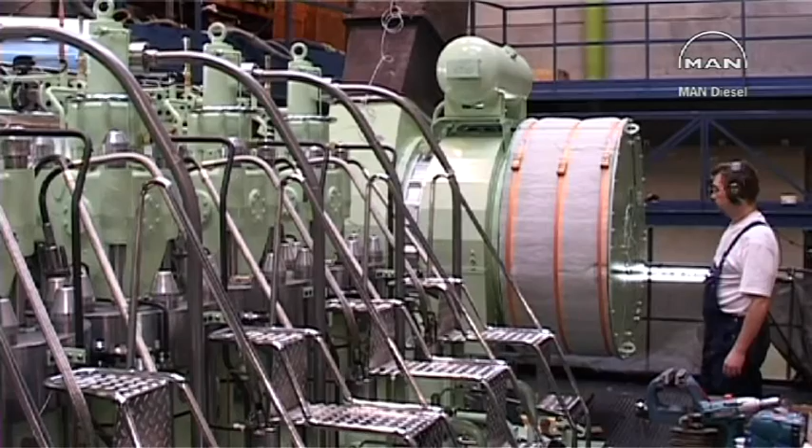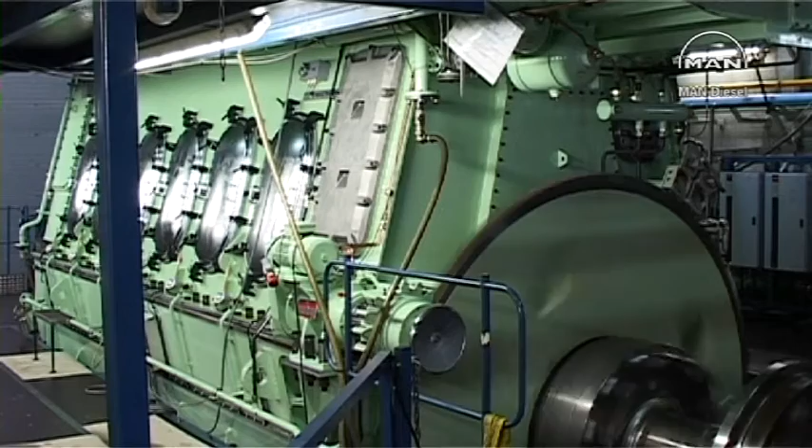These days, the diesel engine propels most of the tonnage of all of the world's shipping. Given good care, the diesel engine provides maximum effect on minimum fuel consumption.

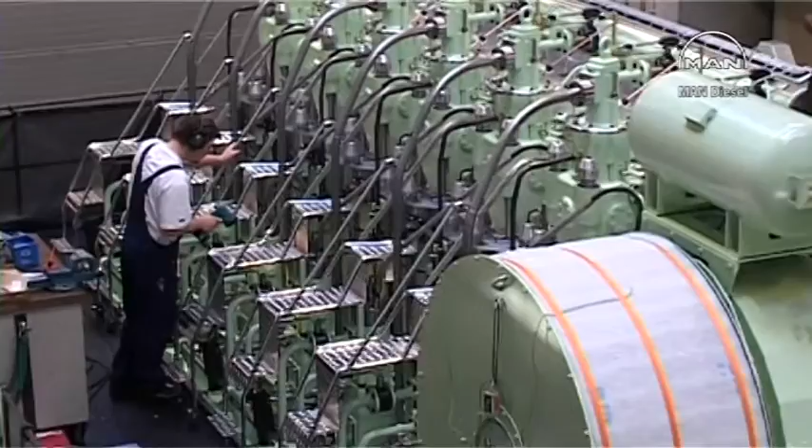The engineer will see to that. At the moment, he's checking the temperatures of the exhaust gas and the cooling water.

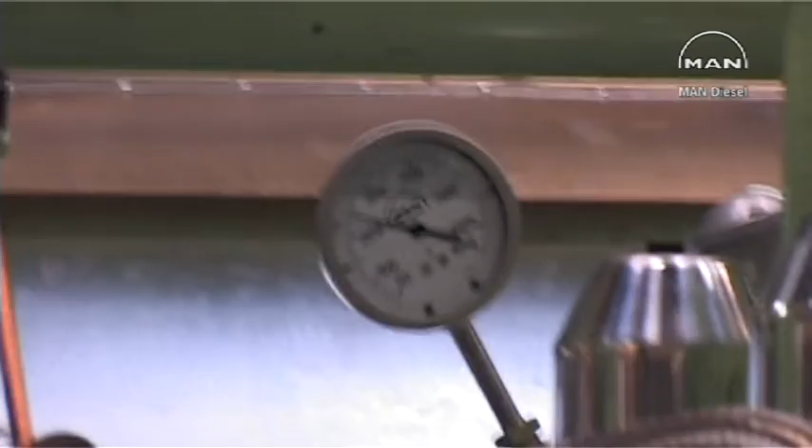To make a further study of the diesel engine, we leave the engineer and his instruments and put sight glasses on the engine from top to bottom. This reveals the movable parts:

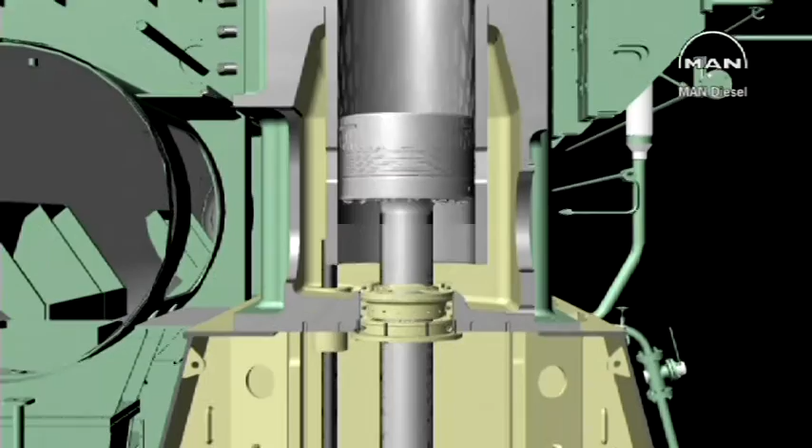pistons, piston rods, crossheads, and connecting rod and crankshaft.

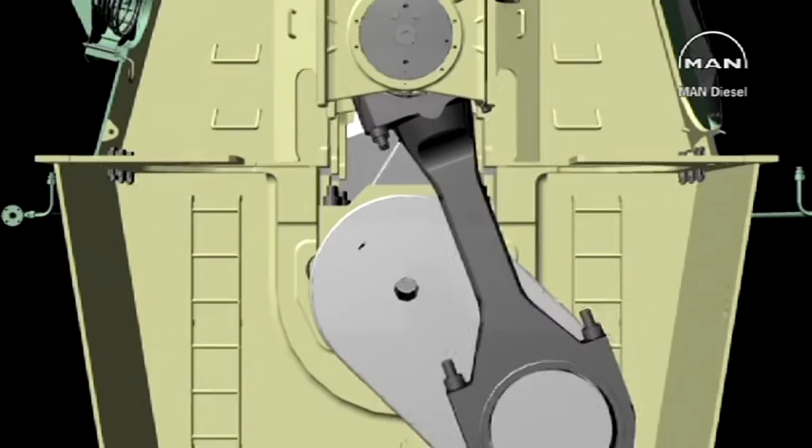This sectional view shows the functions which the most important parts of the engine have to perform.

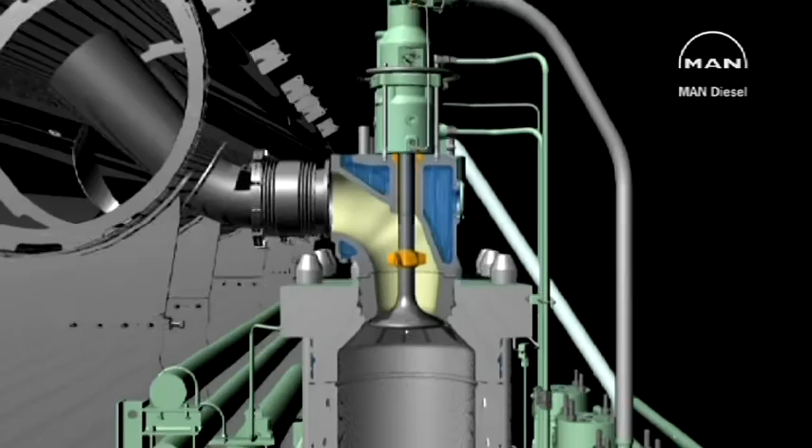In the upper part of the cylinder, an amount of fuel oil is burned, which causes the temperature, and thus the pressure, to rise in the combustion space. The gas pressure acts on the piston, from which the force is transmitted

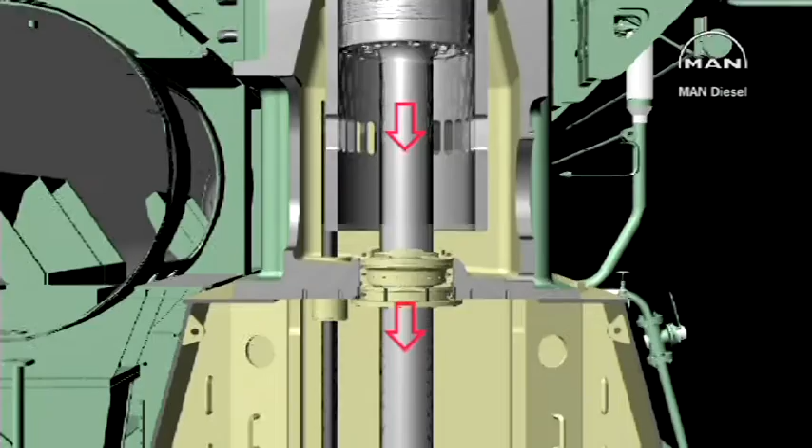through the piston rod and the crosshead

to the connecting rod, and results in a torque.

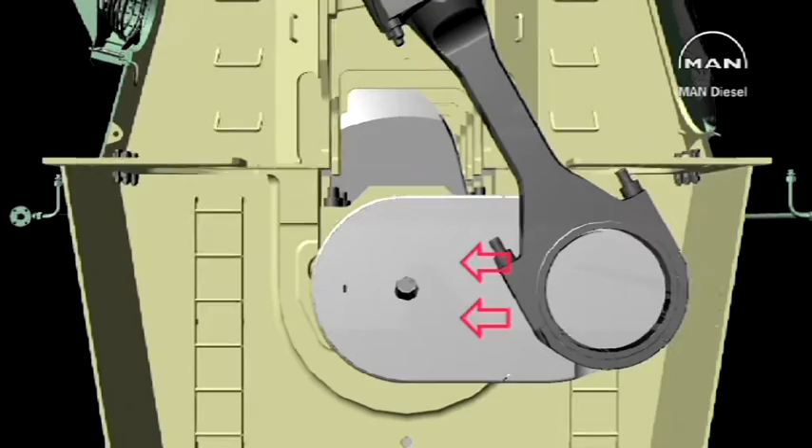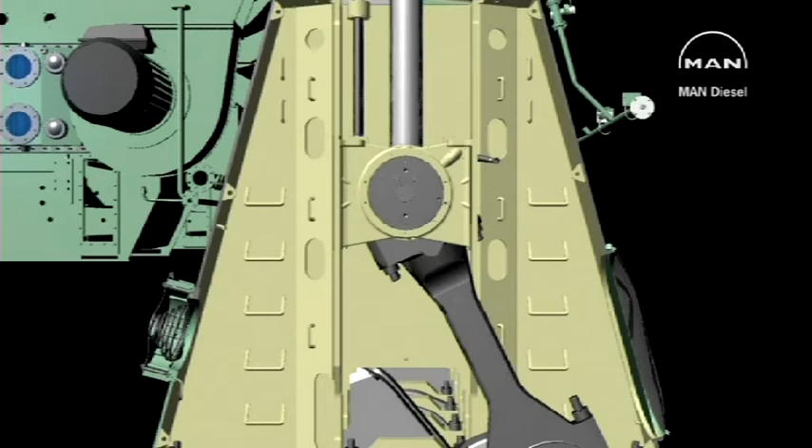The thermal energy has been converted into mechanical energy. In any given piston position during the working stroke, the crosshead is exposed to a vertical force from the piston rod, and a force in the direction of the connecting rod, which together result in a horizontal force.

This horizontal force must be transmitted to the engine frame, and for this purpose the crosshead is provided with slide shoes supported on vertical surfaces, the guide bars on the engine frame.

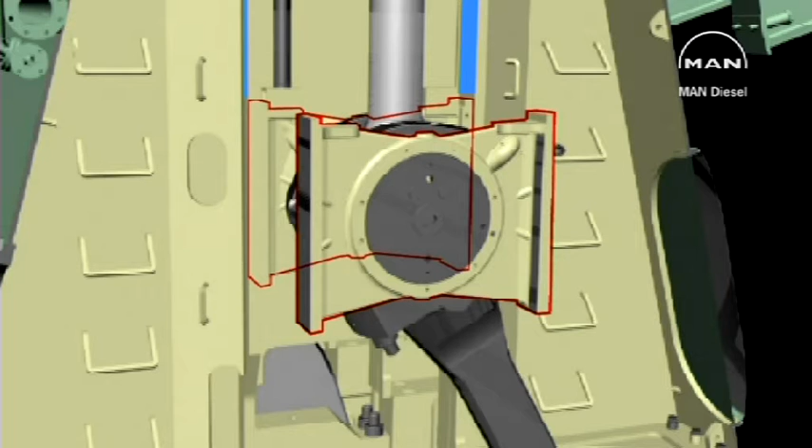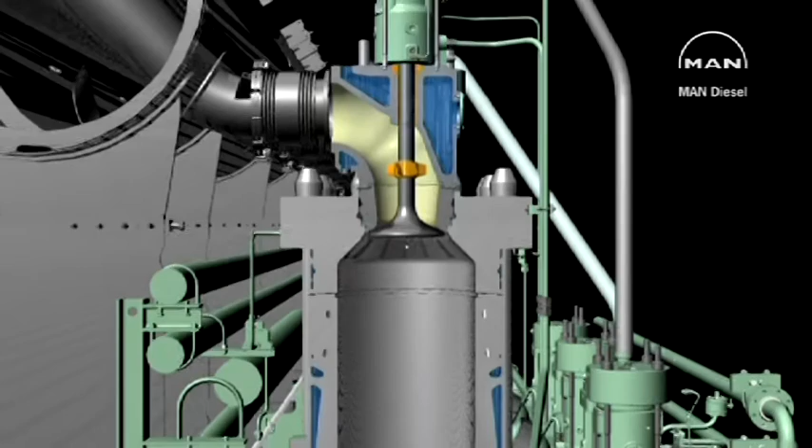Powerful forces are at work in a big marine engine, and accordingly the engine parts are of major dimensions.

To provide sealing against the high pressures, the piston is fitted with piston rings.

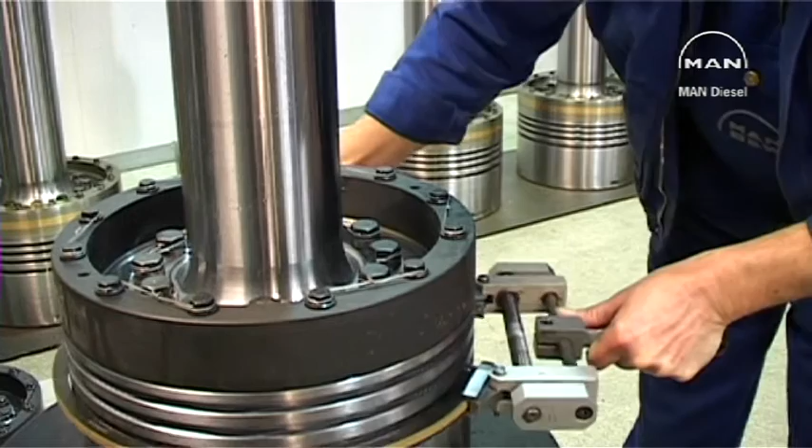The rings are fitted by means of a special tool which evenly distributes a bending moment to the rings, thus preventing the danger of a permanent deformation.

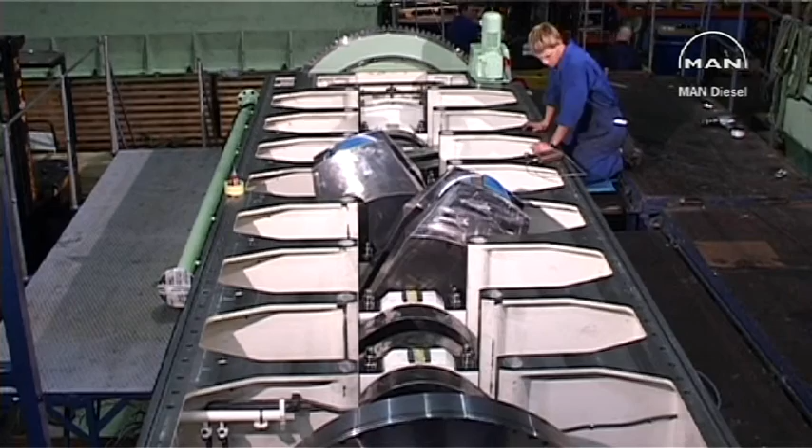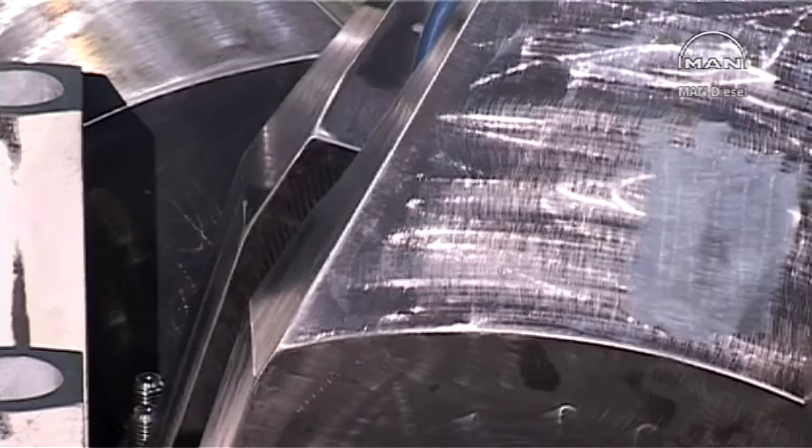On some engines, the crankshaft is so big that to facilitate manufacture and installation, it's made in two halves, which are later bolted together. Each half is built up from a number of main bearing journals, crank webs, and crank pins.

Let's look a little closer at the principle on which a two-stroke engine works. Fresh air is supplied by a turbocharger.

From the turbocharger compressor, it's conducted through air coolers into a common scavenge air receiver along the engine and to the scavenge air space around each cylinder.

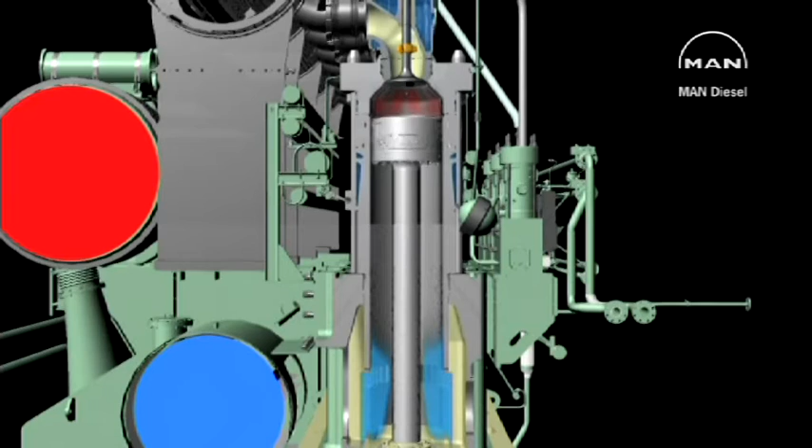When the piston approaches the end of the downstroke, the exhaust valve opens, the scavenge air ports are uncovered, and fresh air flows up through the cylinder.

Exhaust valve and scavenge air ports are then closed, and during compression the air is heated, causing the ignition of the injected fuel. The combustion increases the temperature and thereby the pressure which drives the piston downwards.

The exhaust valve opens, the pressure falls, and the combustion products are expelled while fresh air flows in.

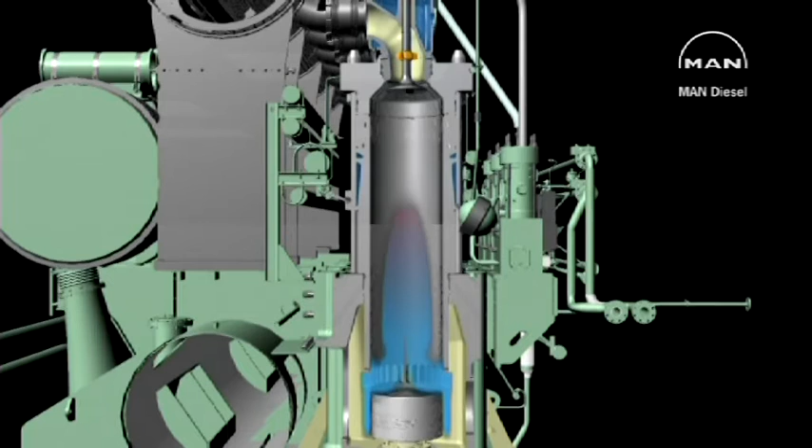The air is again compressed, fuel is injected, ignited, the gases expand,

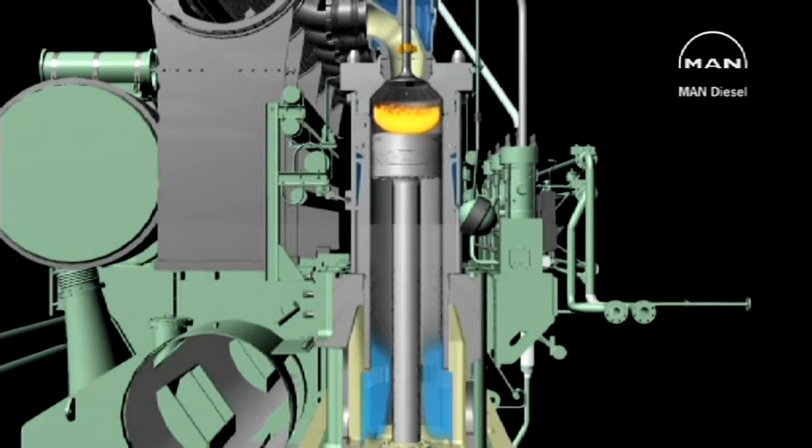the exhaust valve opens, then the scavenge air ports, the cylinder scavenged, and the cycle is repeated.

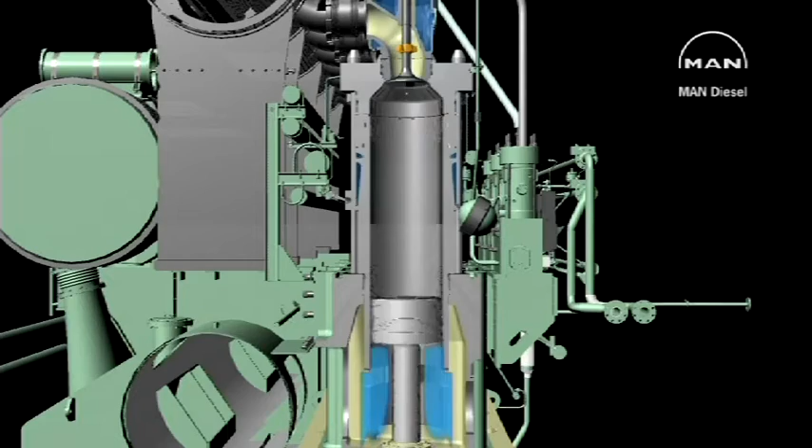The power developed by an engine depends on the pressure sequence in the cylinder. The output of an engine is dependent on the relation between pressure and volume in the cylinder during compression, combustion,

and expansion. For each separate cylinder, the gas process could be described by a curve, the so-called PV diagram or indicator diagram.

The diagram shows that the pressure is almost equal to the scavenge air pressure when the scavenge ports are uncovered. The exhaust valve and scavenge ports are then closed, the air is compressed, and when the fuel is

injected and ignited, the pressure will rise rapidly and remain at maximum during continued injection. After injection, the pressure in the cylinder falls to exhaust pressure and, during the exhaust period, to scavenge air pressure.

Scavenging, compression, combustion, expansion, exhaust, and back to scavenging.

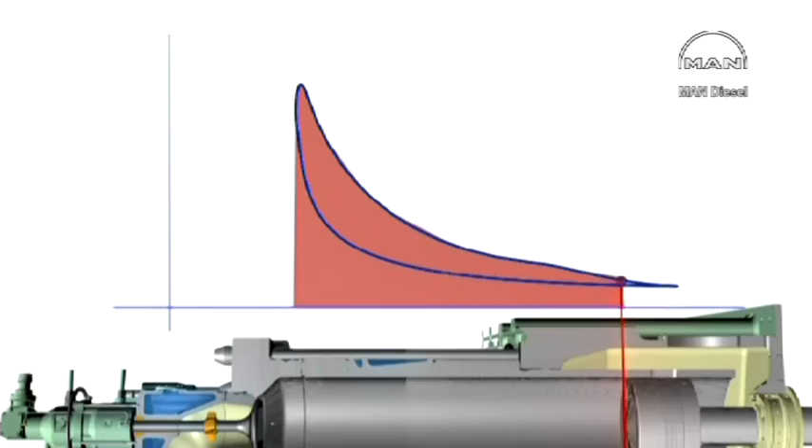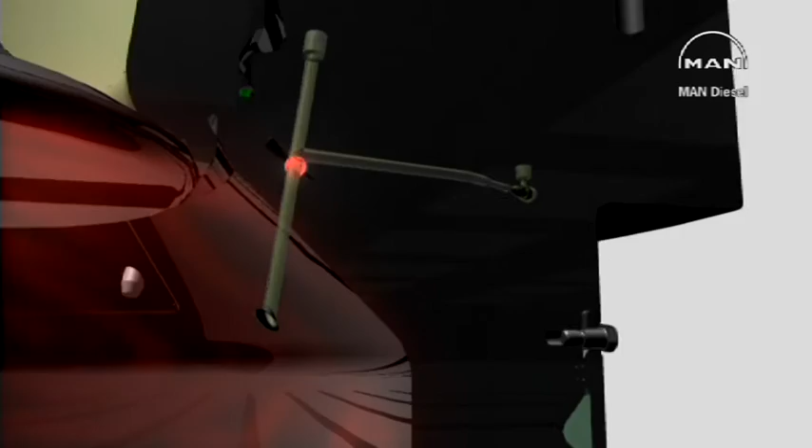The power developed by an engine depends on the pressure events in the cylinder. The pressure events can be recorded by means of an indicator connected to an outlet from the combustion space.

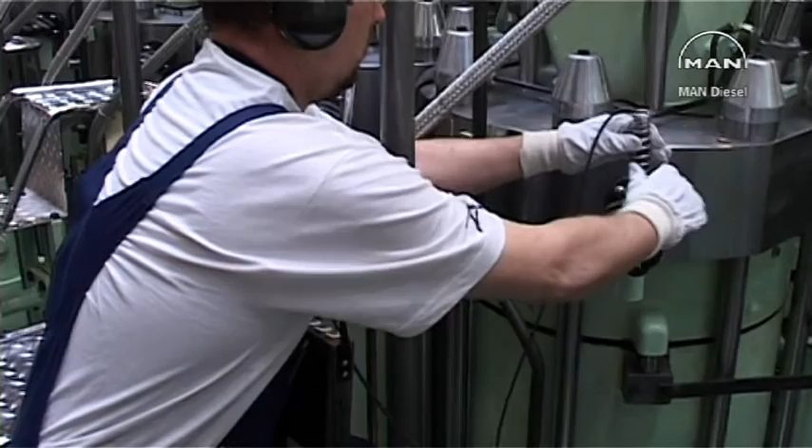The combustion chamber pressures can be measured by a PMI system supplied from MAN Diesel. The PMI system replaces the traditional indicator and indicator drive.

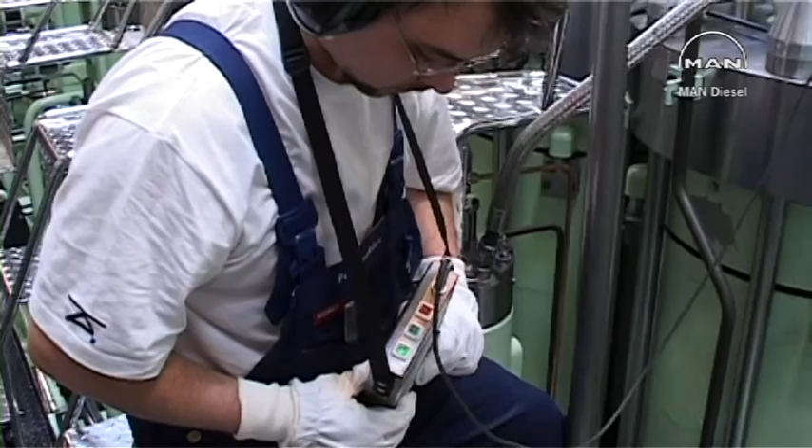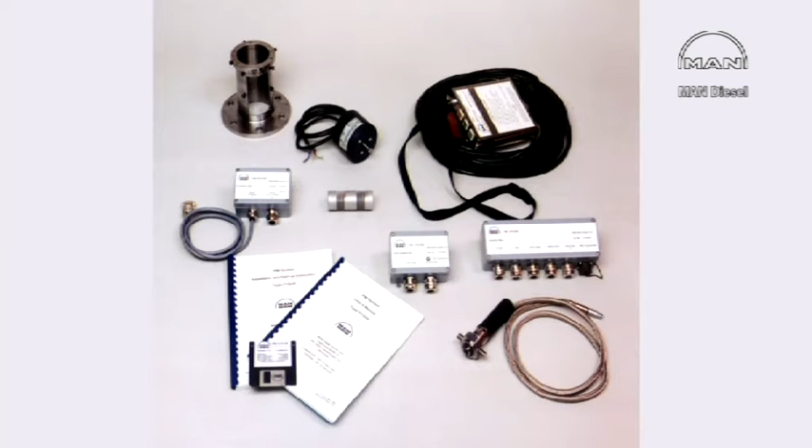The PMI system allows the engine operator, through high qualitative data collection, to further refine the performance and reliability of the diesel engine. Essentially, the PMI system ensures that the load and balance of cylinders is kept within predefined limits with regards to their mean indicated and maximum combustion pressure.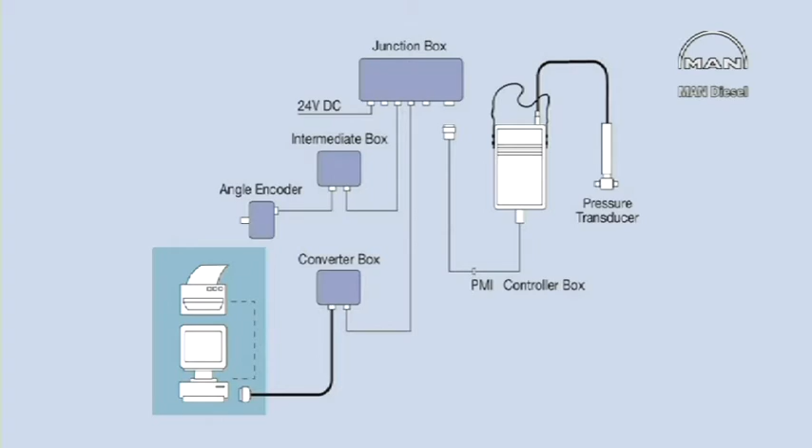The PMI system is designed to produce reliable calculation of mean indicated cylinder pressure and other performance data that require the accurate pressure measurement of cylinder pressures and detection of the crankshaft position.

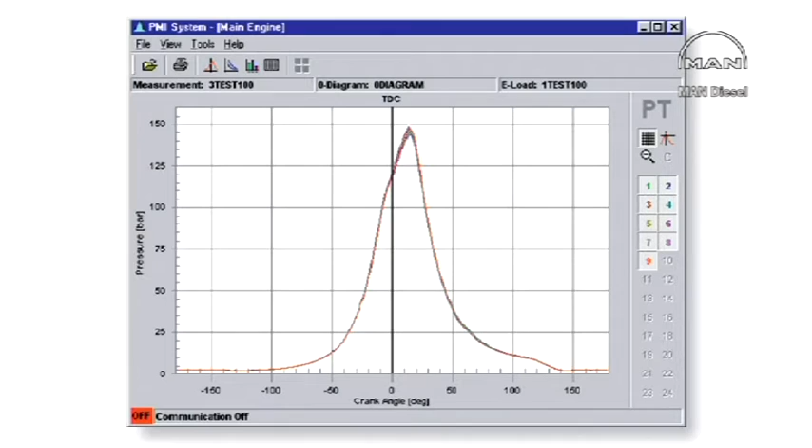the accurate pressure measurement of cylinder pressures and detection of the crankshaft position. From the indicator diagram, the so-called indicated output can now be computed.

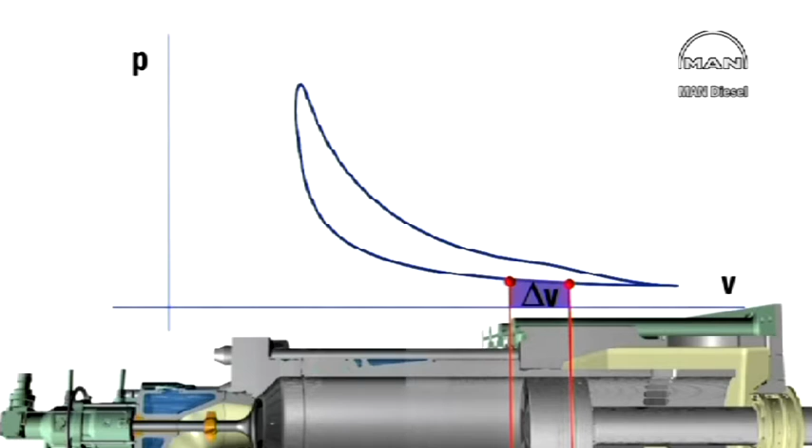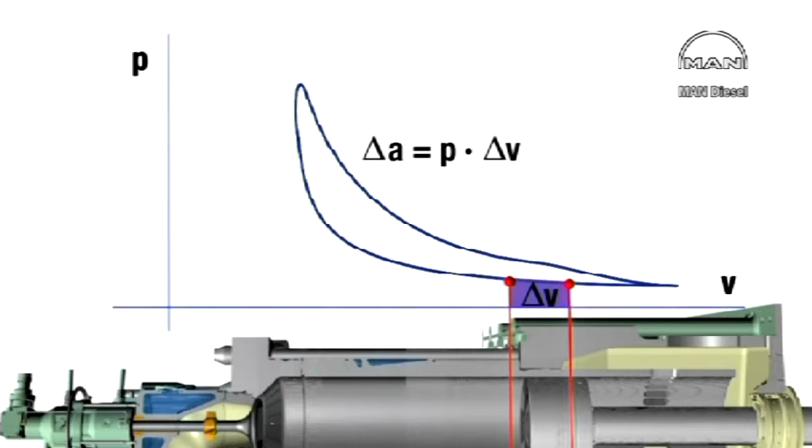At any given piston position during the compression stroke, there's a certain pressure P acting on the piston top. If the piston travels a short distance further, corresponding to delta V, and we ignore the minimal change in pressure, the amount of work done, delta A, will be given by the pressure multiplied by the change in volume, or P times the area below the part of the compression line corresponding to delta V. The same applies to every part of the compression curve. That's to say the whole area below the compression line represents all the work the piston must perform to compress the air in the cylinder.

During the expansion, the piston pressure acts in the same direction as the piston's moving, so the piston receives an amount of work. It can be seen, in the same manner as before, that the amount of work received is represented by the area below the expansion curve.

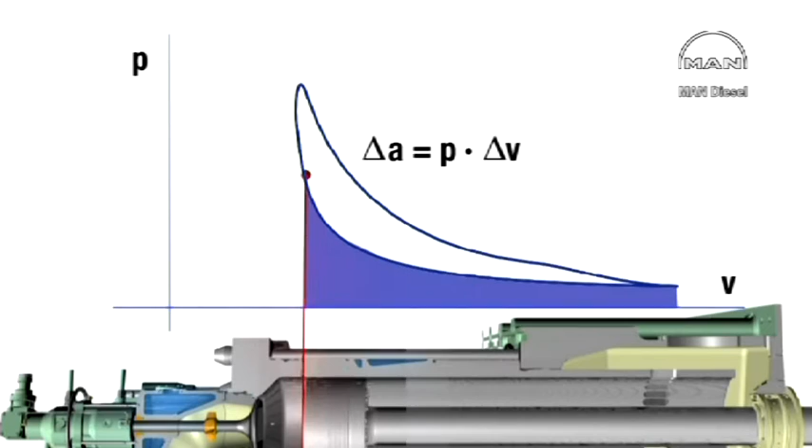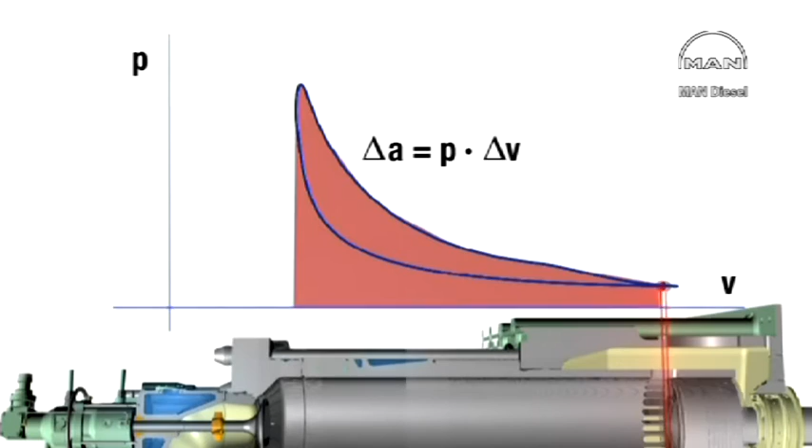The amount of work transmitted to the piston during a full engine revolution must therefore be the difference between that delivered during compression and that received during expansion. In other words, it's given by the area between the curves. Thus, A equals sigma P multiplied by delta V.

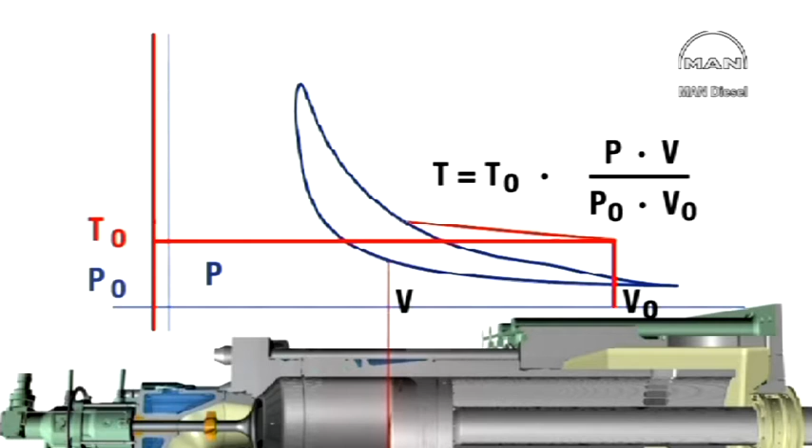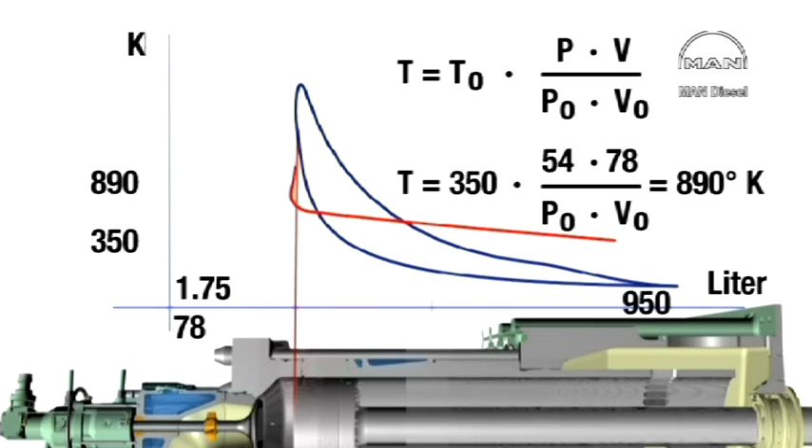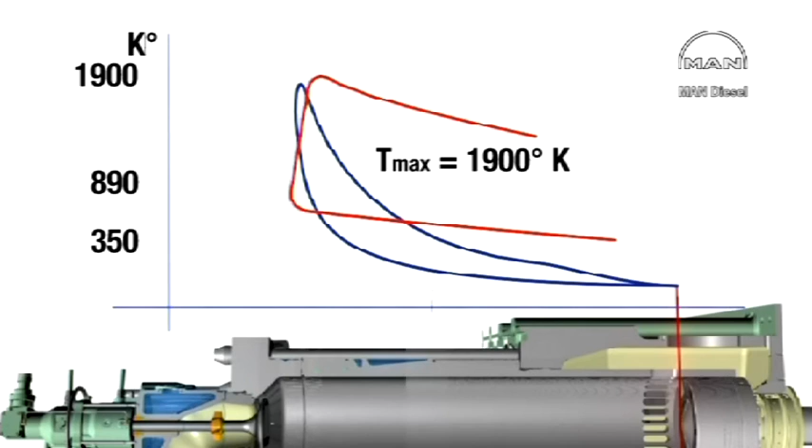The equation can be rearranged to express the temperature T directly for an arbitrary piston position. The indicator diagram gives us the values to be substituted in the equation when computing the temperature. For the top position of the piston, we find the temperature to be about 890 degrees Kelvin. The highest temperature occurs at the cessation of combustion, here found to be 1900 degrees Kelvin. In this way, the whole temperature curve can be calculated right up to the moment the exhaust valve opens. To get a better idea of what's happening, we'll measure in degrees centigrade instead of degrees Kelvin.

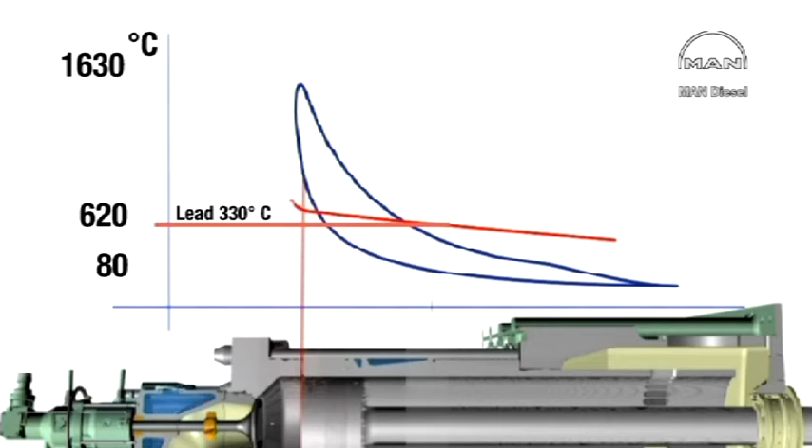Already during compression, the temperature reaches the melting point of lead. During the first part of combustion, the temperature reaches the melting point of aluminium. Shortly after that, the temperature reaches the melting point of cast iron. The high temperatures in the cylinders even exceed the melting point of steel.

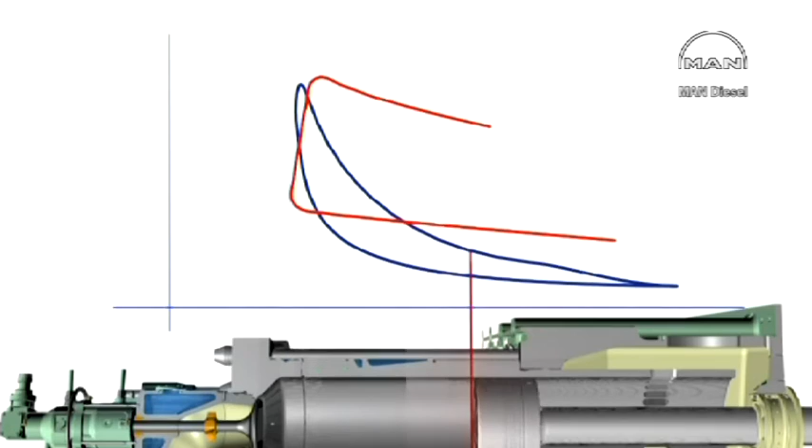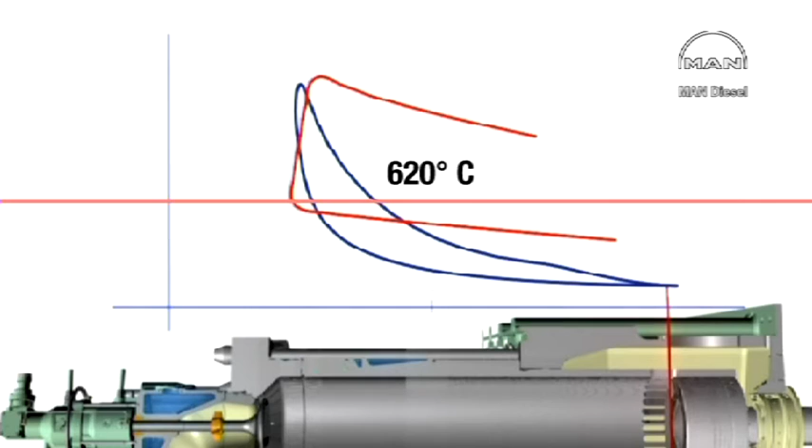Combustion takes place so quickly, however, that there's no time for the high temperature to be transferred to the cylinder wall. The temperature of the metal surfaces will not exceed the mean temperature of the process, about 620 degrees centigrade. Then again, the cylinder is made of cast iron, which begins to lose its strength at already around 300 degrees centigrade, besides which the lubricating oil will lose its lubricating ability if it becomes too hot.

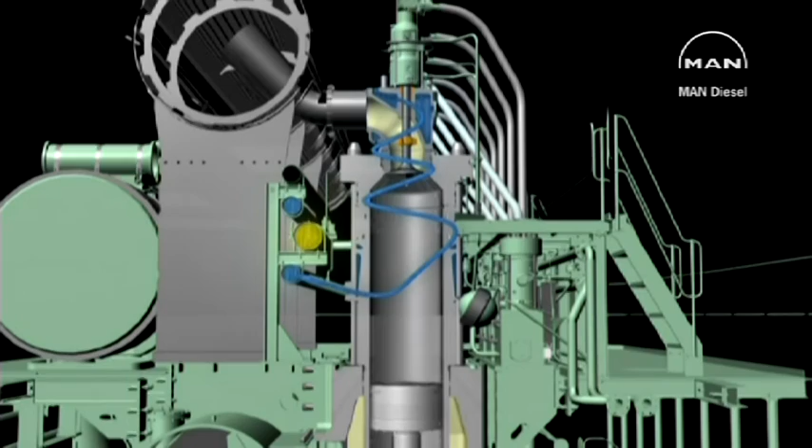It's therefore necessary to provide efficient cooling, partly with oil led through the piston rod up into the piston itself, and partly with water circulating through the cooling jacket around the cylinder and cylinder head, and passing rows of narrow drilled channels placed close to the most heavy, heat-loaded internal surfaces.

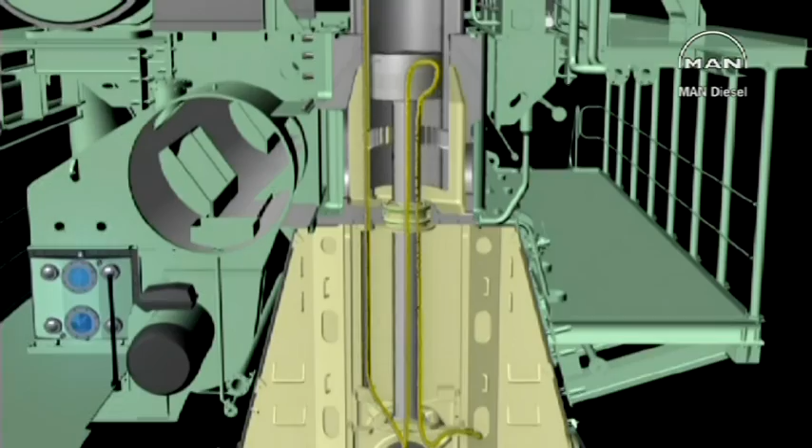If a cooling water outlet temperature of about 80 degrees centigrade is maintained, we can prevent the temperature on the inside of the cylinder wall from exceeding 300 degrees centigrade. This is possible because there's a drop in temperature as the heat passes from cylinder gas to metal.

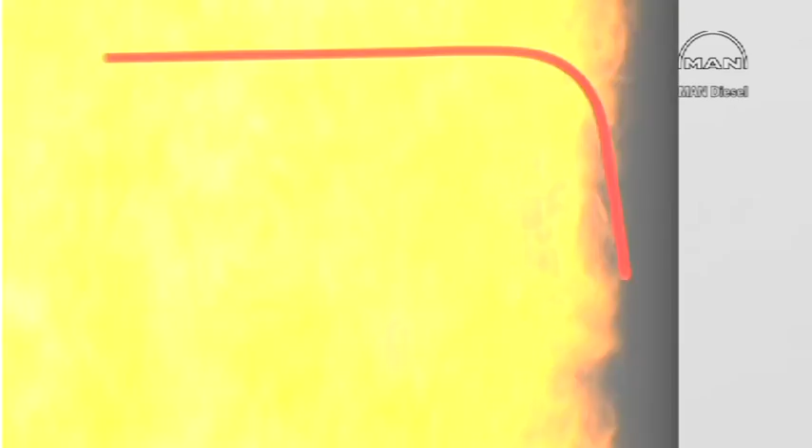Even though the gas is in violent motion inside the cylinder, the boundary layer close to the wall forms a rather effective insulating layer where the temperature falls rapidly. Through the wall itself, the temperature falls evenly, but the heat transfer to the cooling water is controlled by the local boiling point of the water in contact with the wall, the so-called micro boiling phenomenon.

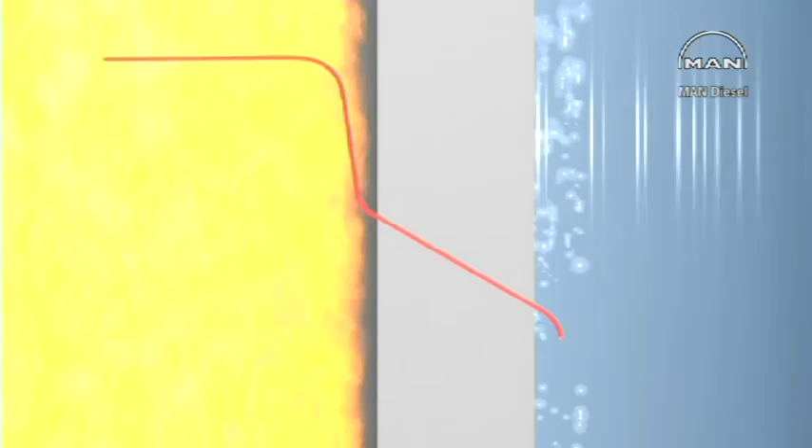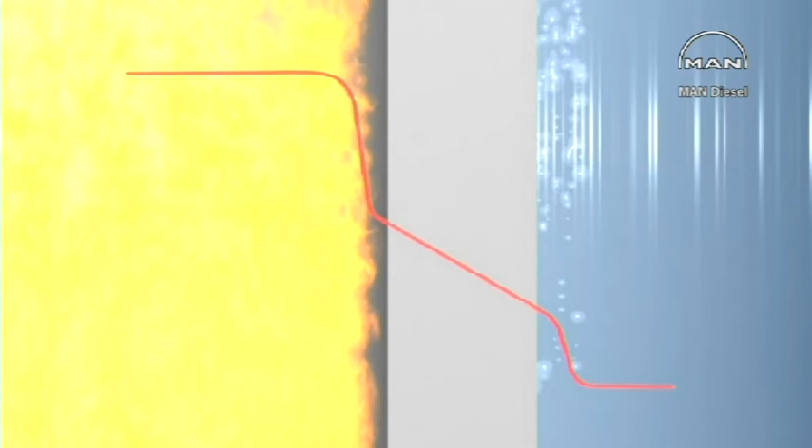The high wall temperature causes local boiling, which is able to absorb relatively large amounts of heat. Small steam bubbles are formed, which immediately break loose from the surface and condense in the surrounding water. Due to this, the wall temperature is almost independent of the transmitted amount of heat, provided the water temperature is safely below its boiling point.

With a mean gas temperature of about 620 degrees centigrade and a cooling water temperature of about 80 degrees centigrade, it's possible to calculate a thickness of iron that offers the same resistance to heat flow as the boundary resistance between cylinder gas and cylinder wall, and similarly a thickness of iron that corresponds to the boundary resistance between cylinder wall and water. As the drop in temperature through the entire homogeneous iron wall occurs evenly, the temperature of the original cylinder wall can be determined.

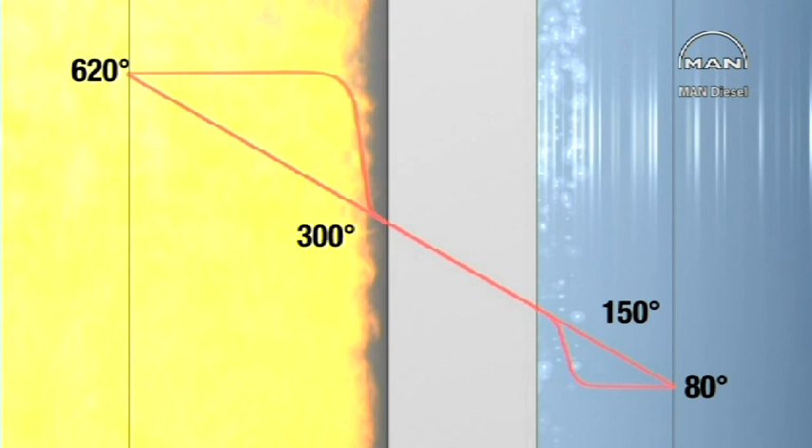These temperatures, calculated for the hottest point in the cylinders, explain why the material of the cylinder walls is able to withstand the high combustion temperatures.

The process description shows that combustion in the cylinders occurs within a fraction of the time of a revolution. Within this fraction of a second, defined by the flashes, about 100 grams of oil must be burned. A strong mixing of oxygen...